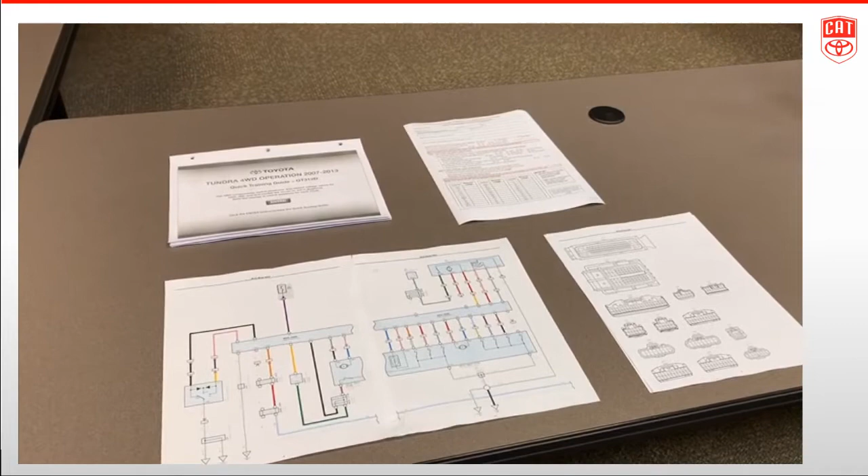I'm going to use a TAS pre-call worksheet and a QTG for a 2007 Tundra we have out back in the shop. In addition to having your vehicle on the rack and prepped, you'll need a few more materials. The first is your TAS pre-call worksheet. On the worksheet there are two sections: we want to know what's going on with the vehicle mechanically, then we diagnose what's happening electrically, and then we surmise where the problem might be.

It's also a good idea to print out any QTGs you may have for this truck, and for mine it happens to be an 07 Tundra, so I did find a QTG for it. It's also useful to have a copy of the EWD. So let's see if we can verify the complaint.

Okay, the four-wheel drive light is flashing. Selector's in 4 high, we're in drive. Let's give a little bit of gas to try to get it to engage. Same response.

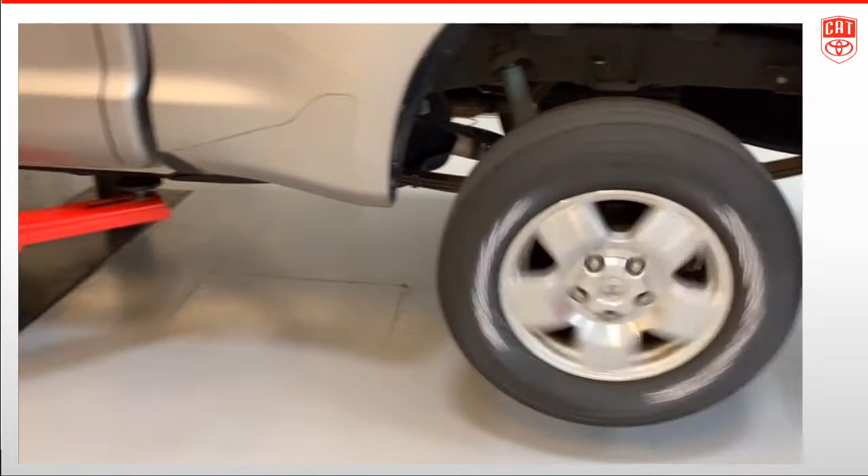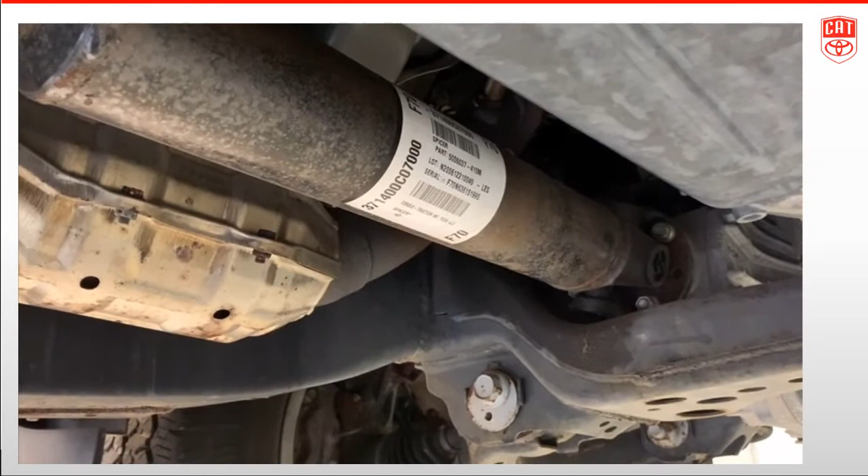Outside of the vehicle, the rear wheel is spinning, the front wheel is not turning. Let's take a look underneath the vehicle and see what's happening with the front drive shaft. The front drive shaft is not turning, so I know the transfer case is in two-wheel drive. Now turn the front drive shaft and observe the front wheels, then turn both front wheels together and observe the drive shaft to determine whether or not the ADD is engaged or disengaged.

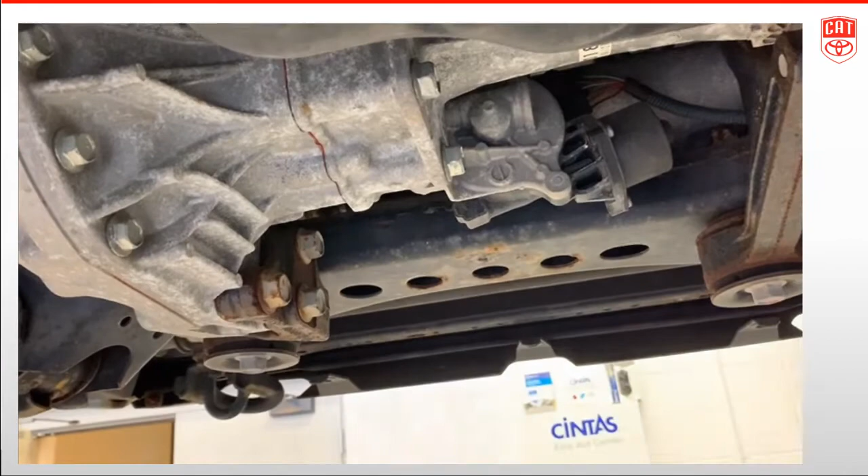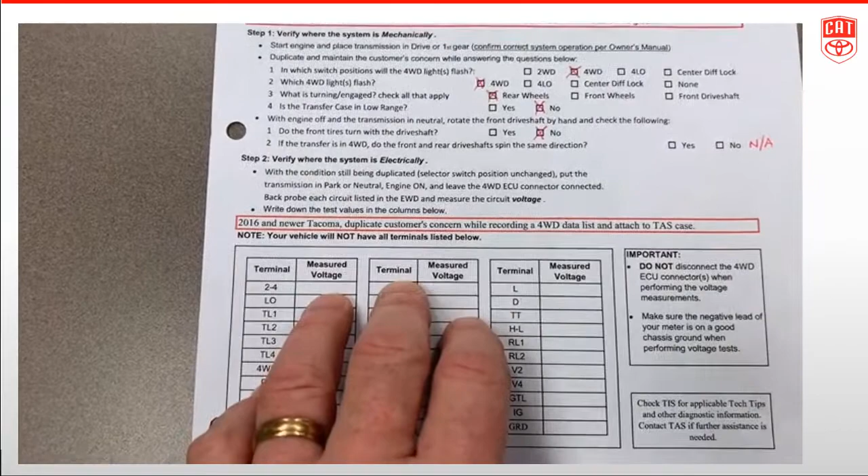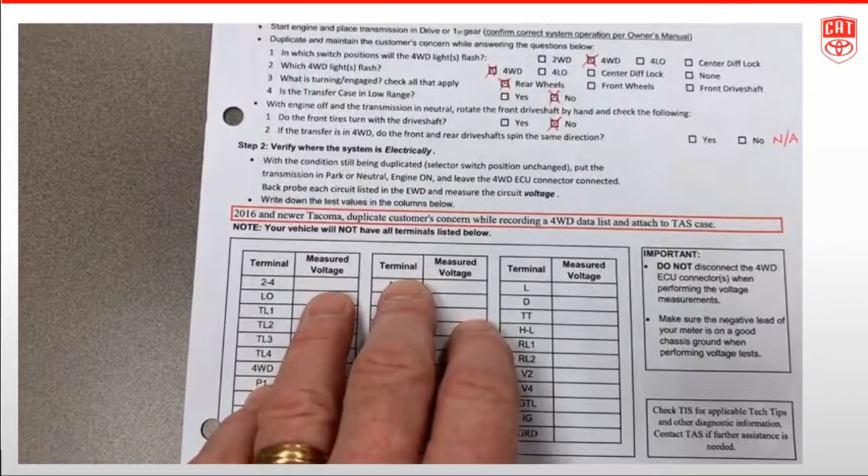Everything I just did is right off of the TAS pre-call worksheet. I know now that when I put the vehicle into the switch position for four-wheel drive, only the four-wheel drive light flashes, that green light flashed. Only the rear wheels turn, the front wheels do not, the front drive shaft does not, so I know a lot about what's happened in the system now. It really is just in two-wheel drive.

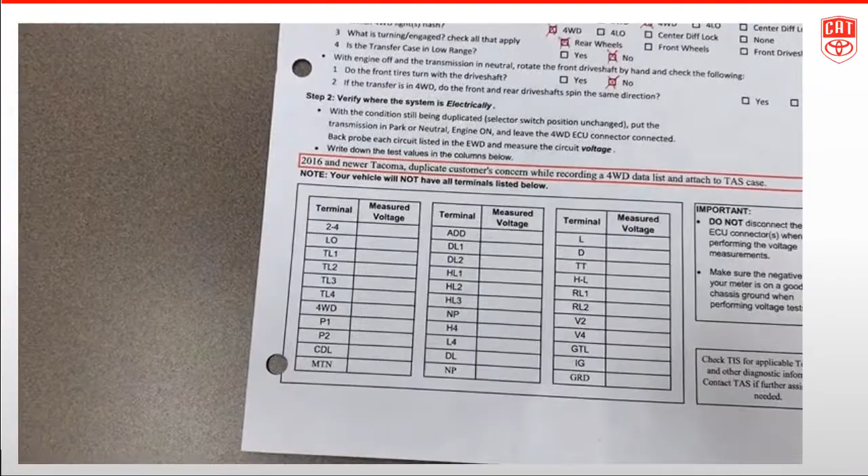Now we're going to take a look at what's happening electrically, and we're going to use the QTG to help us identify where that is.

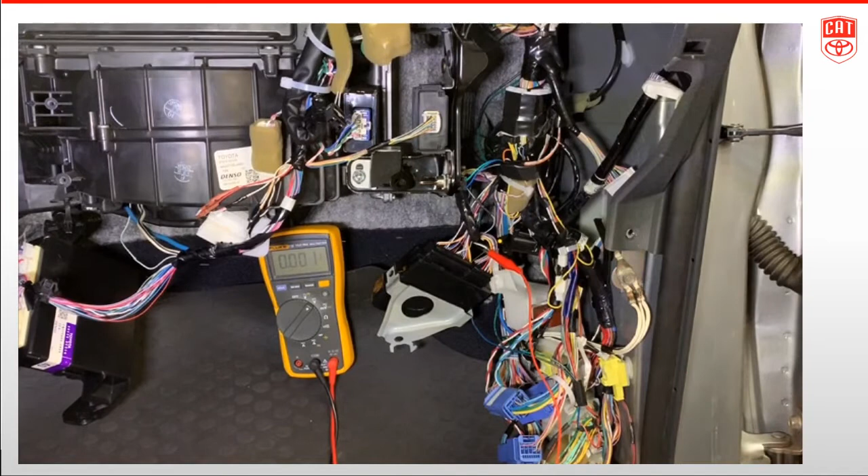The next step in four-wheel drive diagnosis is to leave the truck running, leave the switch in 4 high. I've turned them off to make the sound quality a little better for this video. I'm going to access my four-wheel drive ECU, and using my meter, I want to do some back probing and take some measurements to find out what the voltages are on the circuits involved on this truck.

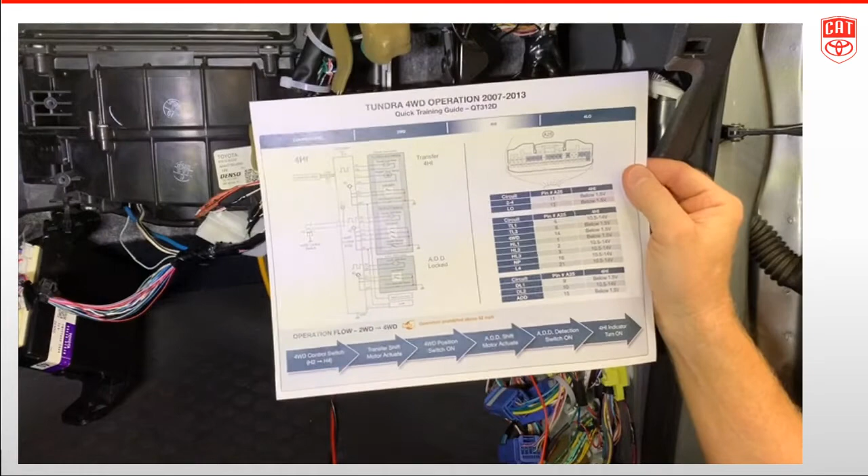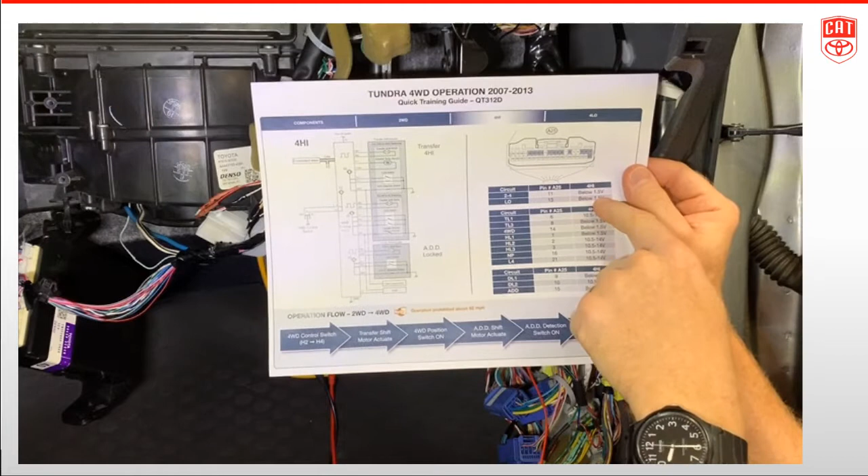Using the QTG, notice I've got the page here for 4 high. On the right side, I've got the back side of the four-wheel drive ECU connector. I've also got my circuits that are involved. Remember, not every truck has every circuit, and it gives me the pin numbers for my connector. On the right side, this shows me all the voltages I should have for all the different pins when I go to back probe.

So what I'm going to do is start with 2-4 at pin 11. My expected voltage with the truck running in 4 high is below 1.5, or about 0. I'm going to make notes in the right-hand column and then transcribe those back onto the TAS pre-call worksheet.

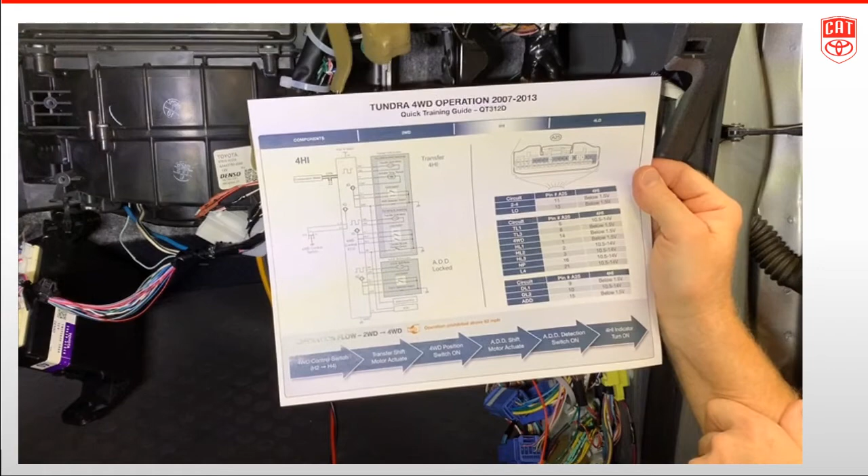So just as a friendly reminder, when you go to back probe, it's really important that you simply get the pin in next to the wire you want to check. Slide it in gently—you don't want to pierce the wire. If you do that, you're going to cause problems with either a broken wire or corrosion in the future. So again, just get it in there gently next to the wire.

Now that I've transferred my information back onto the TAS pre-call worksheet, notice that I've got about half the blanks filled in and about half are empty. That's okay. Remember that this is a generic worksheet and not every vehicle has every one of these switches. So I've got information, that's great, but what does this really mean?

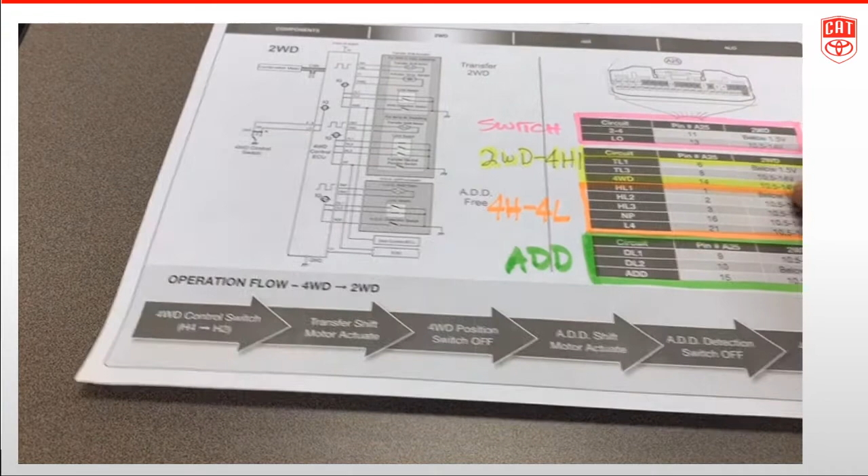I want to go back to the QTG and share a few things with you. Notice that I've got some of these boxes highlighted with different markers. The top box in pink, this is my driver controlled switch to go from two-wheel drive to four-wheel drive or 4 low.

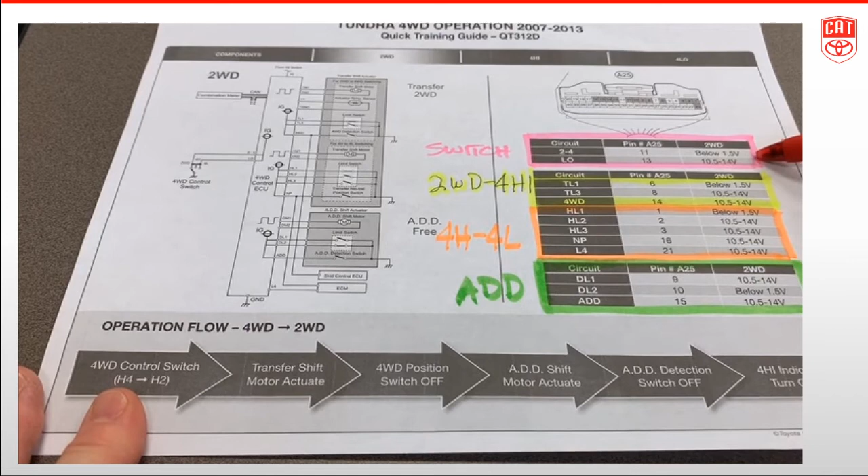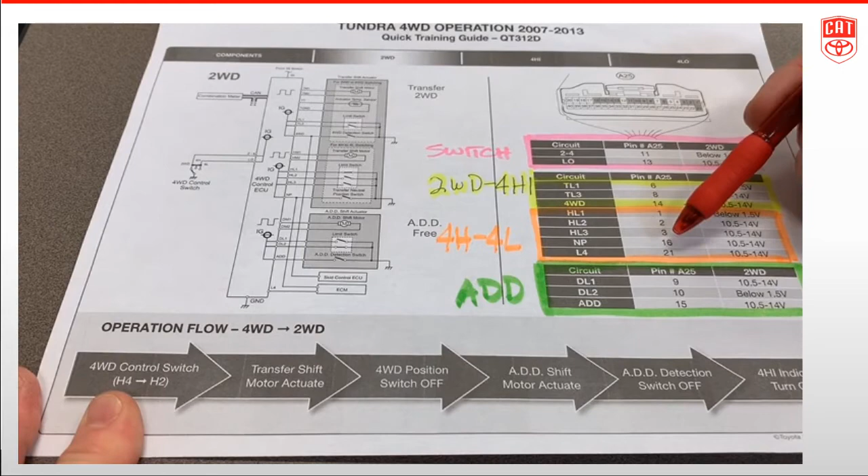This section in yellow, this is inside of the T-case, inside my T-case actuator. These are my limit switches and a detection switch to tell whether or not the motor moved enough to move the T-case from two-wheel drive to four-wheel drive. The bottom section here in orange, that's for the computer to detect whether or not the motor moved enough to shift from 4 high to 4 low. So I've got all these switches inside of my actuator.

The section down here in green, this is on the front axle. This is your ADD, and these are the detection and limit switches there.

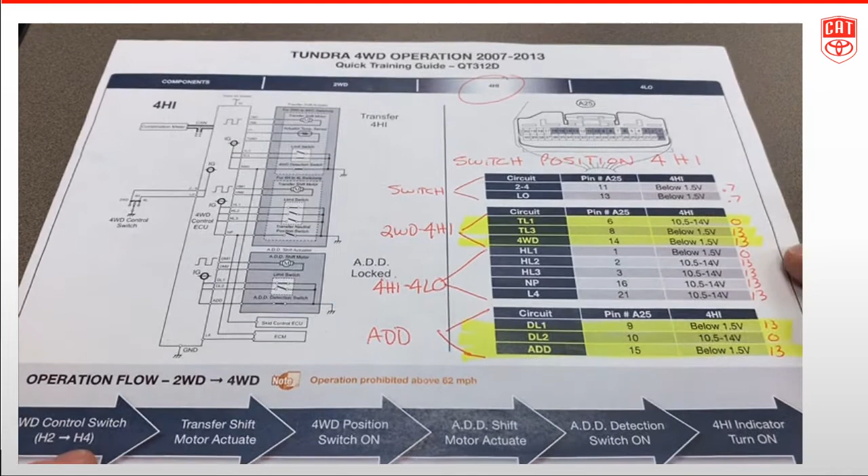Now, looking at the results I obtained. Remember, I had this truck trying to go into four-wheel drive, so I had the switch in 4 high, and these are all the voltages that I obtained in red in the column on the right. The next column in, these are my expected values, and I've highlighted all the different places where I had an error or the voltages didn't match.

Well, I see here now that my two-wheel drive, four-wheel drive shift doesn't seem to have ever occurred. I'm looking here at the switches. I've got TL1, TL3, four-wheel drive detection. Those are the 3 that are incorrect.

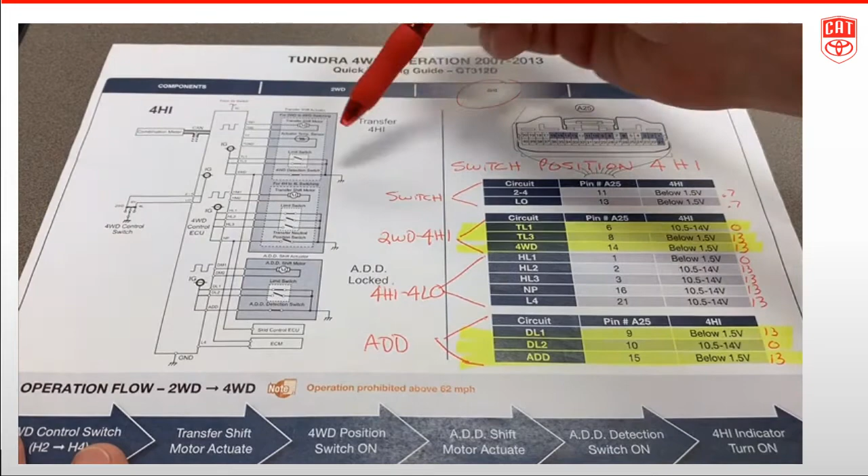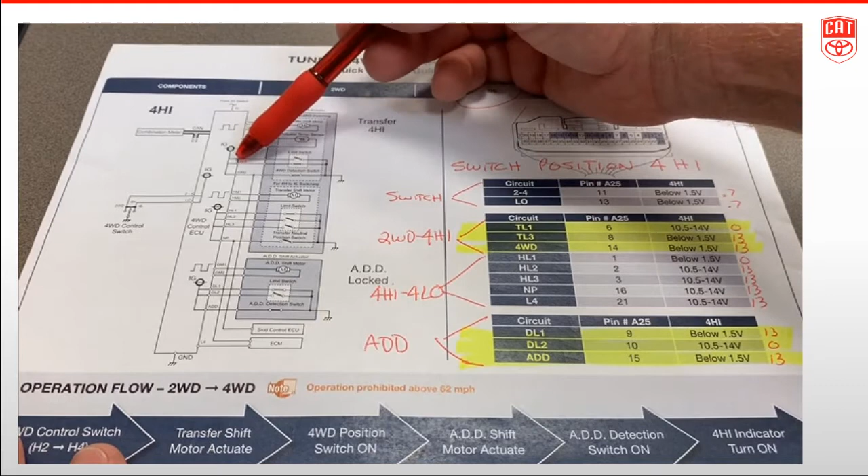Looking at the switches, when I'm in four-wheel drive, if the shift occurred, TL1 the switch should be open. TL3 the switch should be closed. Four-wheel drive detection, the switch should be closed. So an open switch, the computer should read 12 volts. A closed switch, the computer should read 0 volts. Closed switch, the computer should read 0 volts. So 12, 0, 0 - that's what it expected, but I got just the opposite.

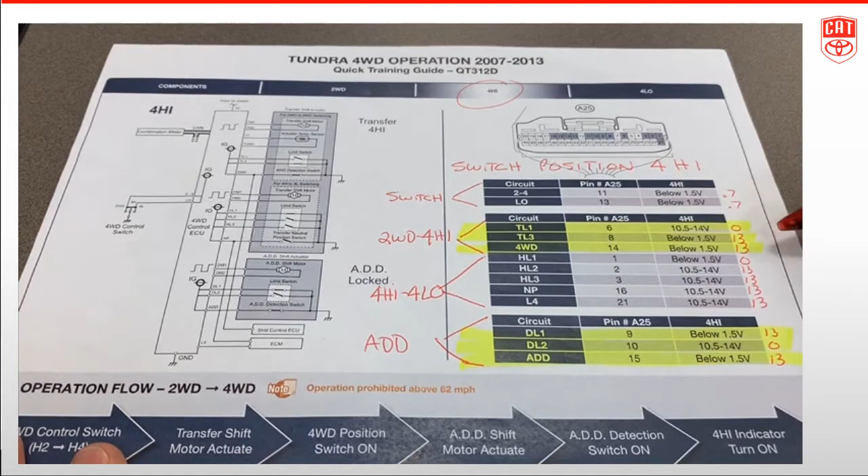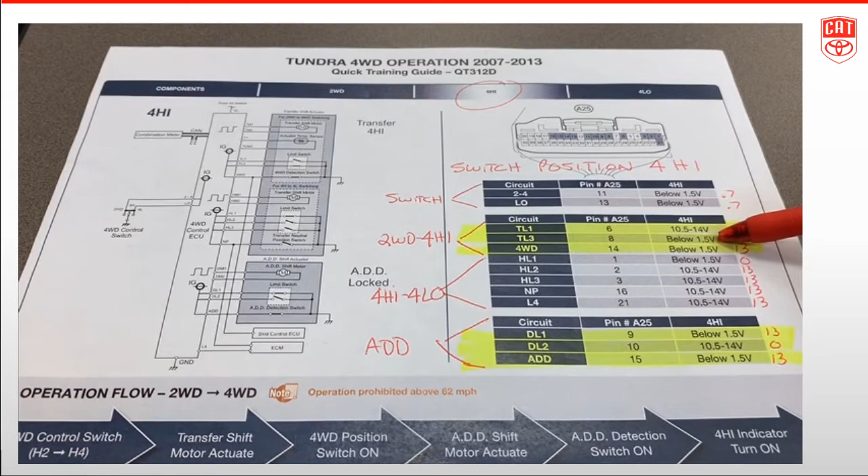This is telling me that this motor never moved, or all 3 of the switches had issues where they didn't register. Which one's more likely? Same with the ADD - because my two-wheel drive, four-wheel drive switch never took place, or I don't believe it did, we never got this far, so naturally this wouldn't have happened either. I recognize that from my operation flow down here at the bottom.

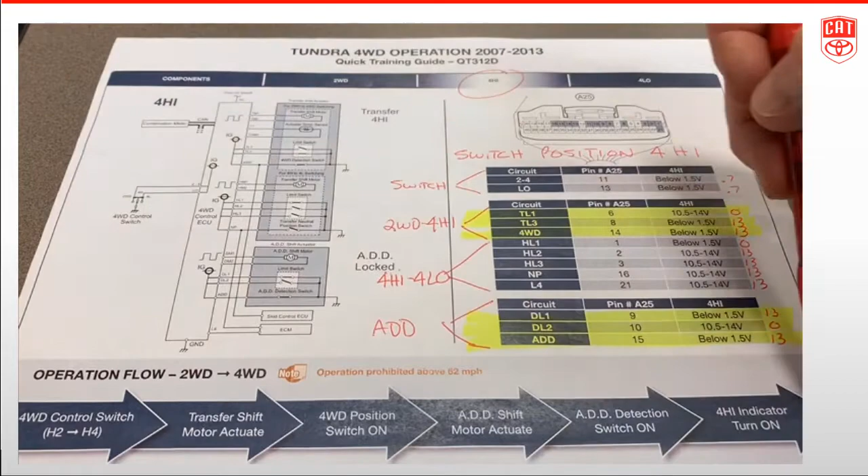Now, one thing I want to check real quick - my switch checked out okay in four-wheel drive. If I put that switch back into two-wheel drive, these are all my results. Notice what happened here with the switch - it went into two-wheel drive, those readings were good, and all these other readings match. So doesn't this tell me that the truck is really in two-wheel drive and no shift ever took place?

So my next step now is going to be to go back out to the shop and check the motor itself to see whether or not the motor actually operates.

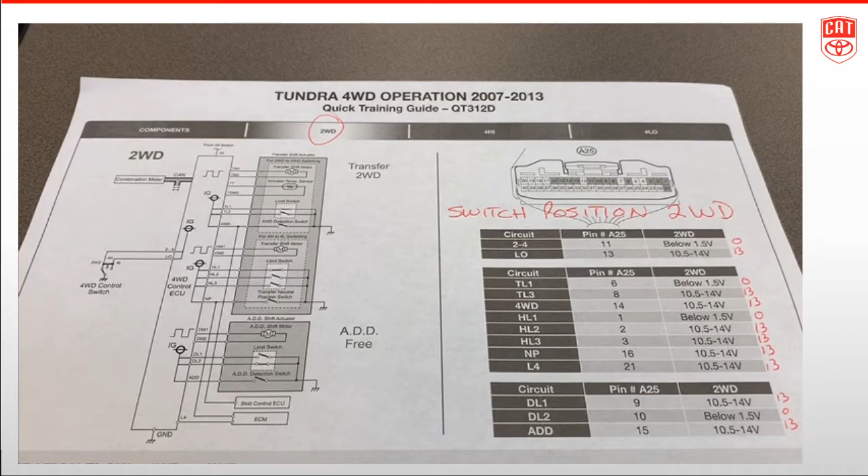So back out at the truck - your next step in this progression would be to determine whether or not the four-wheel drive transfer case motor can actually work. That's going to be a whole nother subject for a whole nother video. But what's important now is that you know a little bit about how to use a TAS pre-call worksheet and a QTG to diagnose where your problem is.